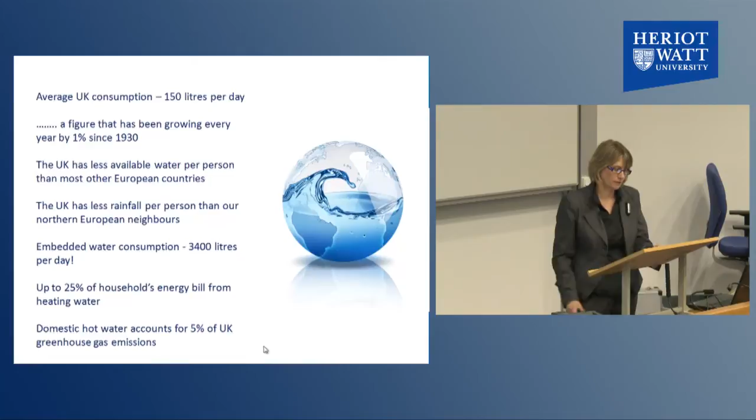The other thing we observe is that personal washing, so bath taps and showers combined, gives us 33%. Over a number of decades, you see that this percentage has gradually increased. So between these two factors, personal washing and WC flushing, we actually use quite a lot of water.

So why don't we just use less, particularly with the WC? If you think about how the WC is supplied, the water is treated to potable standard, in other words to drinking standard. It's supplied through the infrastructure, we then use it to feed the cistern, we use it to flush the appliance, the WC, so we contaminate the water, and then we feed it back into the infrastructure to treat it all over again and recycle. So hugely wasteful in terms of energy, water, and cost.

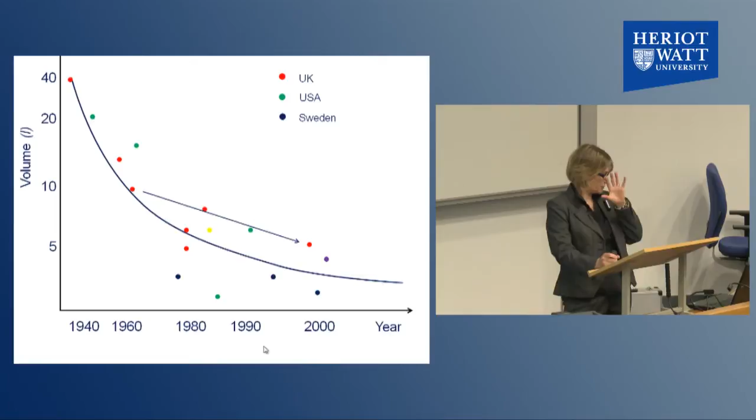And the final point, I hope they're blue on your screen, is to look at the blue dots here. They actually show the consumption values for Sweden, and if you look, they go as far back as the 1970s. These are embedded in policy and regulation in Sweden, and show that we can actually use water consumption of as little as 3 litres in a WC. That's been done quite successfully over a long number of years, and I think it really sets a good example for what we're able to do.

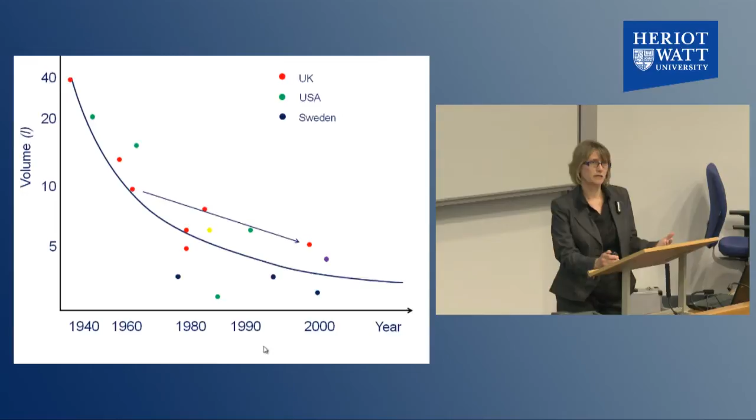So it does beg the question, are we able to still use much less water, in particular for the WC, but for other purposes as well? That brings us to the research we do at Heriot Watt. What are the main drivers behind this? Well, water conservation, we've already discussed, but we also want to save material, energy, and in some cases space in a building. The final point is we also want to make sure that we protect health and hygiene.

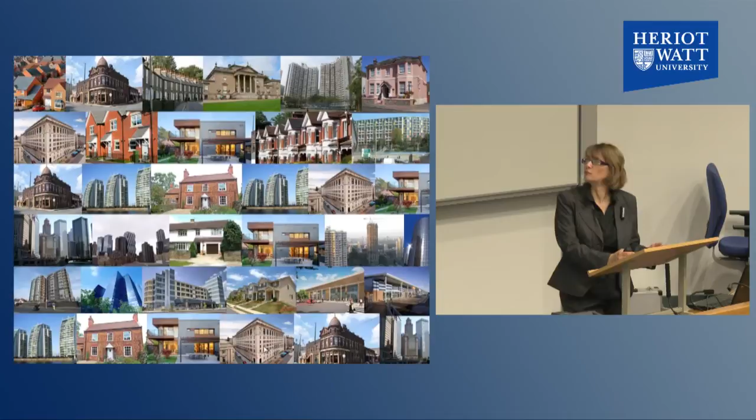To give you an idea of the scope of what's covered, we usually refer to this as being in building or at the property level. Although we talk about water conservation, and clearly that desire to bring water conservation levels down applies across all buildings, some of the research we do and the numerical modelling techniques we have more specifically apply to bigger or more complex buildings, but that conservation message applies across the board.

And finally, for rainwater, we want to make sure that we're not prone to flooding. We want to make sure there's no overtopping of gutters and no ingress of water into our buildings. So we've identified the key functions that we need these systems to provide.

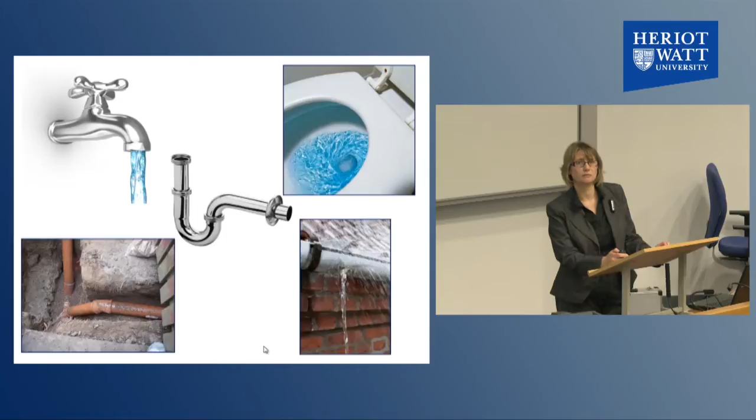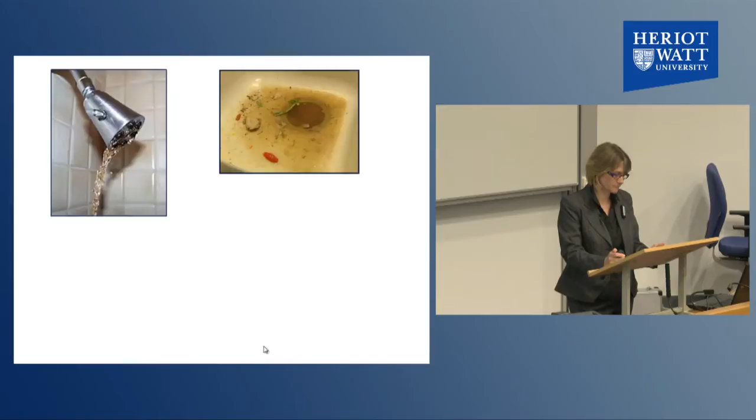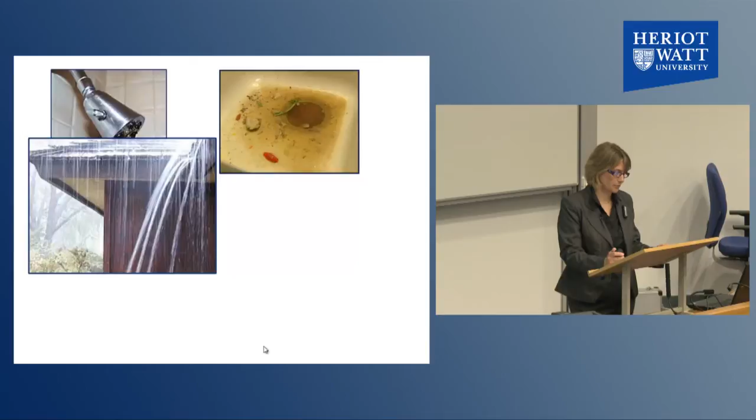You may also have had overtopping of your gutter, and this leads to a number of problems. There can be localised flooding, ingress of moisture into the building, and problems around water that gathers around the building that can then penetrate at a later date.

Where we have CSOs, combined sewer overflows, the environmental damage can be quite severe. So there's a range of cases in which the implications of failure of our systems can be really quite significant.

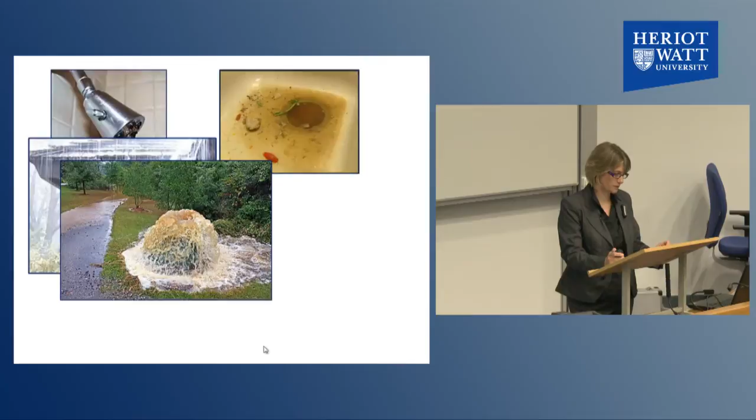You may have seen images in the news and press on what happens when we have blockage of drainage systems. These types of images are reasonably common, but still something we should be able to avoid. This type of blockage will actually cause upstream problems that can be quite severe.

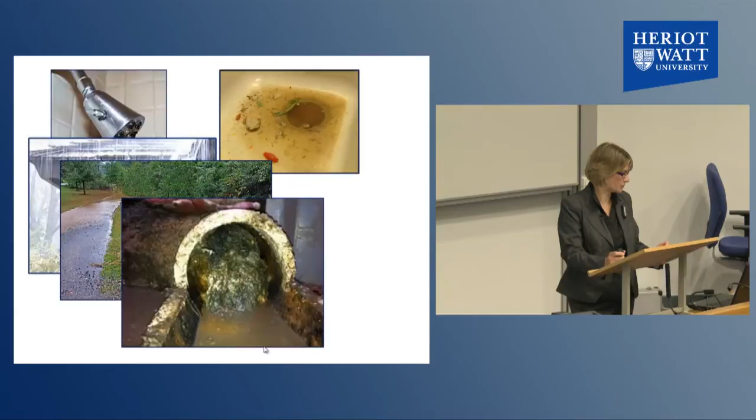Then finally, you have cases where flooding, normally combined stormwater and sewer flooding, can be particularly unpleasant, and the consequences of this can really be quite severe. Although this looks messy and it's a very unpleasant task to clean up after, there are real financial, health and social implications of this type of flooding that are particularly unpleasant.

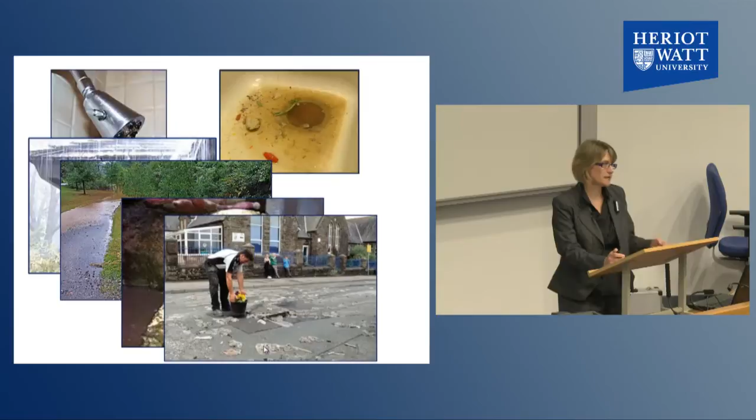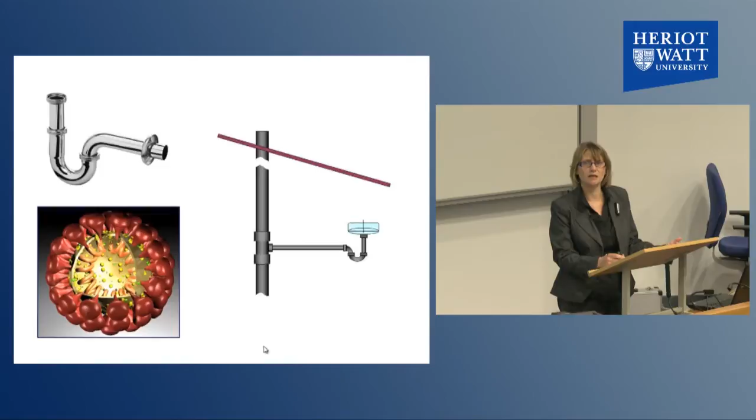And what we know is that every system is dynamic. It's dynamic because we use appliances in different ways at different times. It's dynamic because the discharge characteristics, sometimes referred to as a hydrograph, will change as the appliance is discharged into the network. And then we have attenuation - attenuation of the flow, the water or wastewater in the pipes, but also of the air and the air pressure transients as they move through the system.

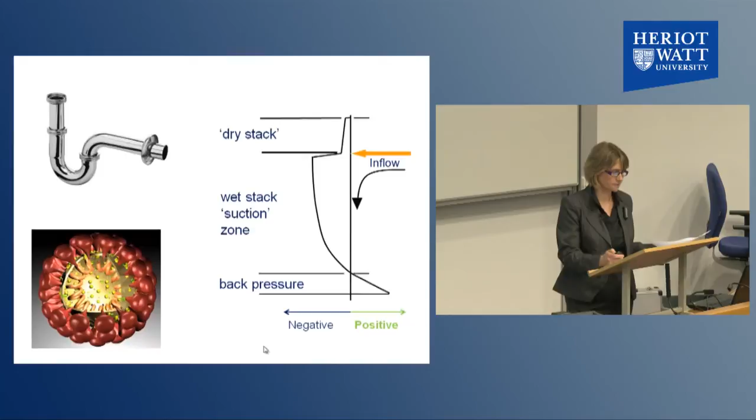What you see then is you get changes in this profile. To understand the nature of these changes, we understand the drivers, but we also develop the numerical model so that we can predict the pressure response of the system and then put control strategies in place to make sure the pressure doesn't exceed the level that would deplete the trap seal.

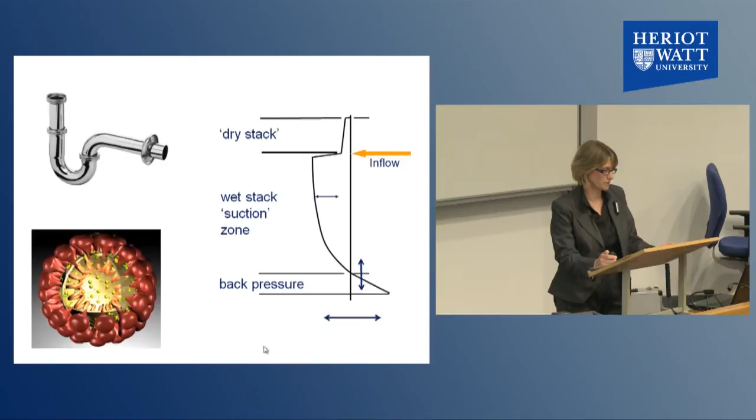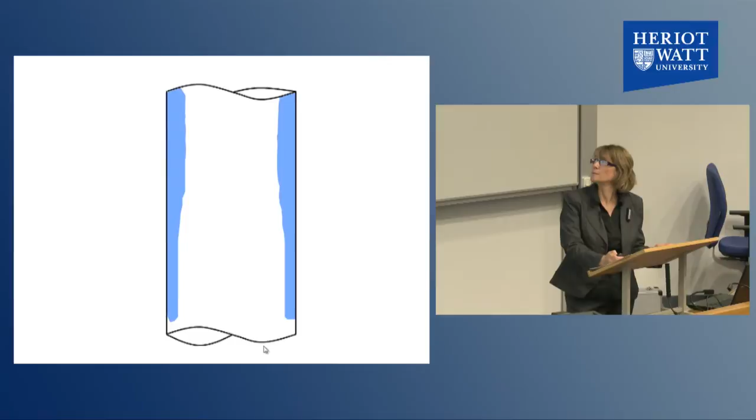So the fundamentals of the flow: we have our vertical pipe, and in that pipe we have what's called annular flow. In other words, the water doesn't fall in the middle of the pipe, it falls as an annulus around the circumference, adhering to the internal surface of the pipe. Standard theory tells us that flow accelerates as it travels down the pipe until it's balanced by the frictional force, and we reach terminal velocity and terminal thickness.

In a case like this, with a pipe approximately 100 millimetres in diameter, that terminal thickness would be of the order of 5 to 10 millimetres.

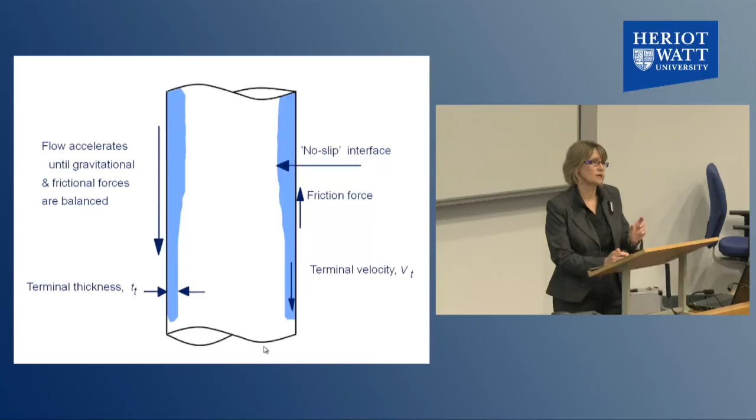The key part in all of this is this no-slip interface, the interface between that water annulus and the airflow. This is the part we're really trying to understand, because this is the driver for the whole system. It's this interface that actually draws the air through the system, generates the pressure change, and means there is a need for engineers and designers to understand performance and regulate those pressure fluctuations.

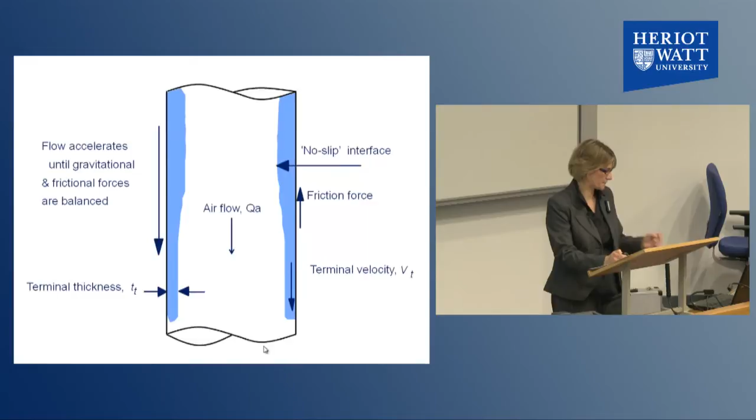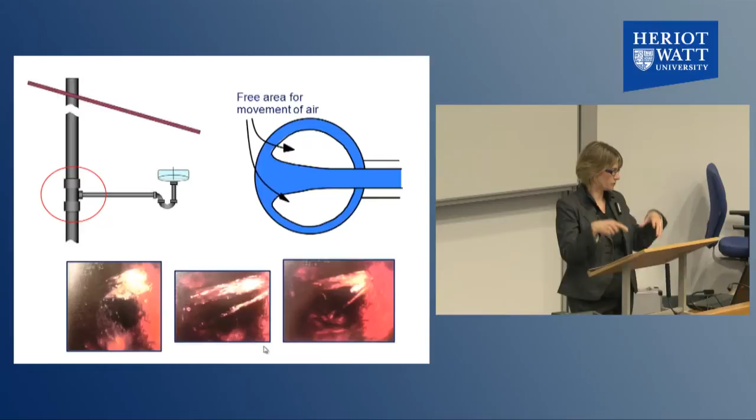Coming back to those concentrated losses, we've looked closely at the two sets of concentrated losses, one in the branch connection here. It would be nice to assume that as the flow comes in from the branch connection and reaches the main stack, it heads to the other side of the pipe, there's a swirl component, and it comes back on itself and travels downwards. This right-hand diagram is in plan view, so it would be nice to assume there's a fairly regular pathway for air to move through the system, with no real impediment other than the water curtain presented here.

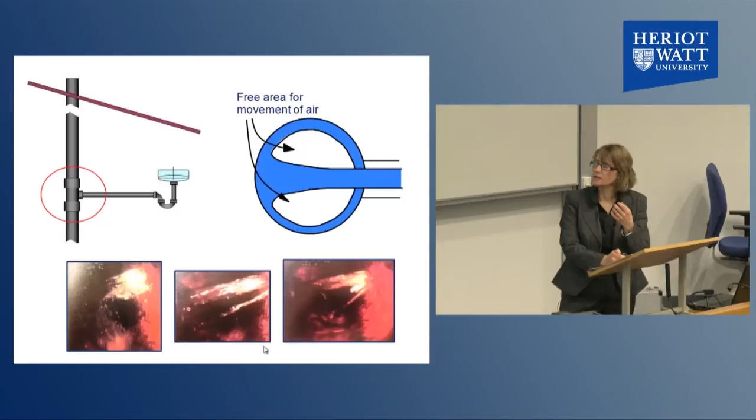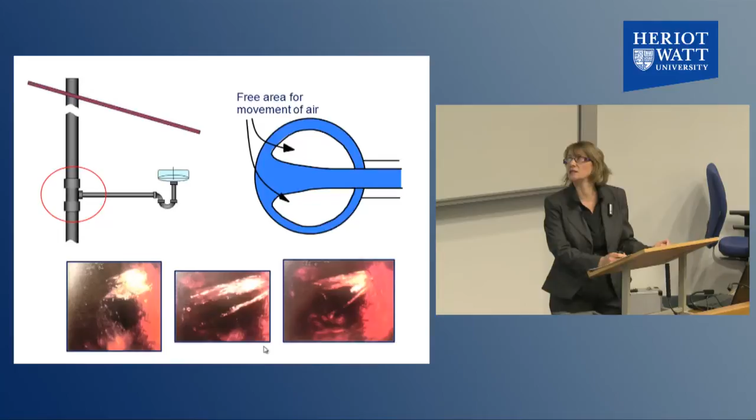But these images at the bottom, though not very clear, are actually taken from inside an active live drainage pipe. They show that the separation of the water and the air is nowhere near as clean as that. You can see we have pipe roughnesses, a slight angle on the pipe, and the water flow is not regular - it's not easy to predict the changes in that water curtain behaviour that then influence the pressure changes. At the bottom, remember, is our other concentrated loss area.

This is the other part we really need to understand. On the left-hand side, we've got the transition from vertical to horizontal. As the water comes down as an annulus and turns the corner, in this case there is no separation of the water downflow from the inner pipe radius. That means the water comes down the vertical pipe, and as it reaches the bend, it still adheres to the inside surface of the pipe, where it then falls to the bottom and is fed through the horizontal pipe. So there's no impediment, no stoppage in this particular case.

For the example on the right-hand side, though, we do have detachment - what's called a point of separation of the water. A water curtain is formed, which prevents air moving through the system and generates, in this case, a positive air pressure transient that is propagated back through the system. Now that transient has to go somewhere, so we'll come back to this later - where does the transient go, and how do we account for those changes in pressure?

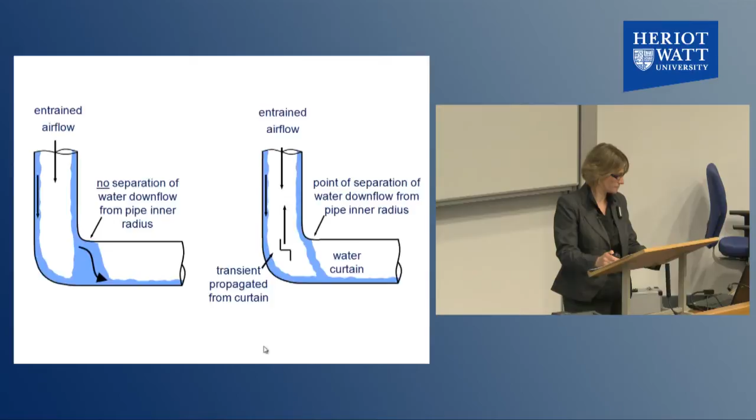1872 became a professor at the Imperial Technical School in Moscow. And he's quite an interesting character, actually. He actually established the world's first aerodynamic institute, and he mathematically defined the origin of aerodynamic lift and the optimum shape for the aerodynamic shape that we see on aircraft wings.

Within the context of water and what we're looking at here, though, he actually also established the water hammer equations. And it's those equations that we use to drive the model and to understand the changes. One of the key things to remember from this work is that the rate of change of flow condition is the determinant of the potency of the transient.

What we also know from this work is that if you actually multiply together some of the factors that indicate how high the pressure change might be, we would multiply fluid density, wave propagation speed, so this is how quickly the change is communicated through the system, by the change in velocity.

And if you take something like a WC, which perhaps at its peak has a discharge flow rate of around 2 litres per second, what that translates to is a vertical flow velocity of around 1 metre per second. So you can do this sum in your head.

You've got velocity of 1 metre per second that's then stopped by the curtain at the base. So 1 metre per second is stopped. We have a wave propagation speed of the speed of sound, so roughly 340 metres per second, and the density of air is around about 1.2. So you multiply those three things together, you get something of the order of 400 pascals, or roughly 40 millimetres of water gauge. So that gives us then an indication of the level of pressure.

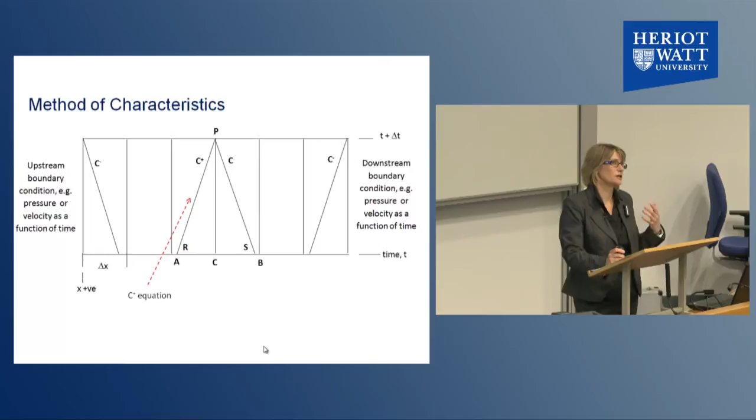The first is that if we look at these characteristic equations, these are the equations that communicate the change through the system and allow us to predict the pressure and the airflow and velocity through the network. So defining the characteristic equations is quite important.

Embedded in there, we'll come back to this, is the friction factor that is the driver between the water and air interface. So we need to understand that condition.

We also need to understand what we refer to as boundary conditions in any model. Identifying those boundary conditions in the case of a drainage network, they would be pipe elbows, traps, and pipe terminations. Those types of boundary conditions have to be defined and then fed into the model. But once that model's built, we can look at the way the system responds in terms of pressure and airflow, and we can begin to control the pressures through the whole network.

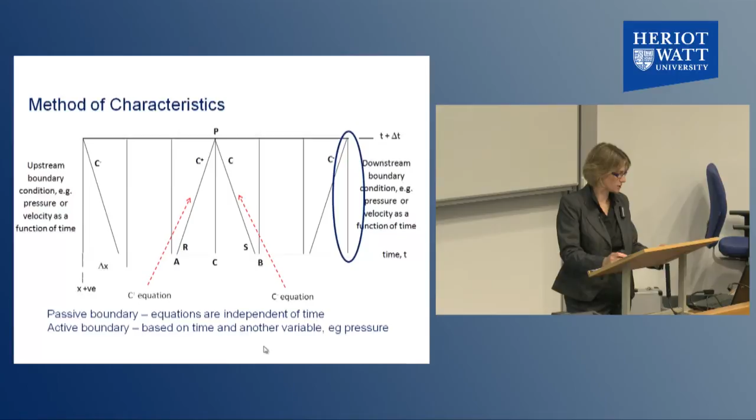We have two different types of boundary. One is passive, in other words the equations are completely independent of time. The other is active, meaning there's a time variance to the definition of that boundary condition. To give you an example of the types of active boundary that we might have...

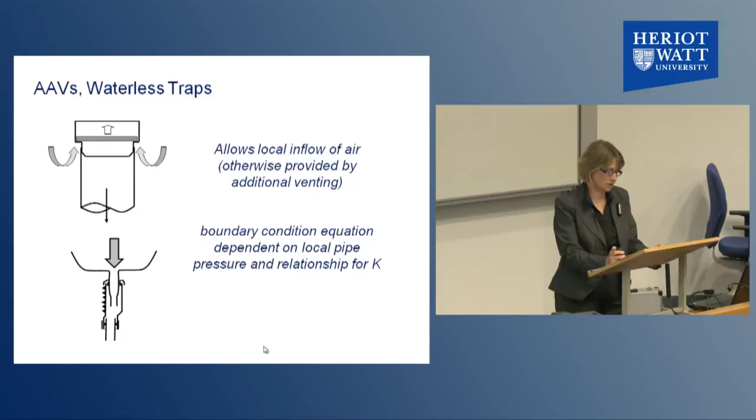What that's done is use of the model has allowed us to develop a product called the PAPA. We've dealt so far in the lecture only with negative pressures, but recognizing that we have positive pressures generated at the stack base, the PAPA was developed at Heriot Watt based on the application of the simulation model, and deals with the positive pressures in the system.

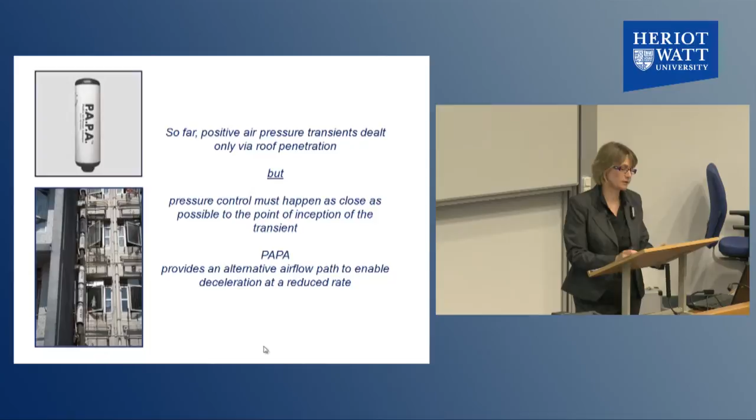The PAPA has inside an expandable bag that changes the way the wave is transmitted inside the network, decelerating the flow so that we come back to this rate of change issue. The PAPA provides an alternative airflow path to enable deceleration at a reduced rate, and that's the key point of the PAPA. You can see here in the lower diagram a case in Hong Kong where some of the PAPA devices are fitted in series to a building that had particular problems with positive pressure generation.

You might recall the diagram where we had the interface between the water and the air, which was assumed to be very clean. You've probably surmised that interface is not quite as clean as indicated by those diagrams. So what we have is a friction factor that operates at that interface where it's not clean at all, and we have some mixing of water and air. It's almost a two-phase flow in the central component of the stack. Trying to understand the surface and the driving factors, the no-slip interface is really what drives the numerical model.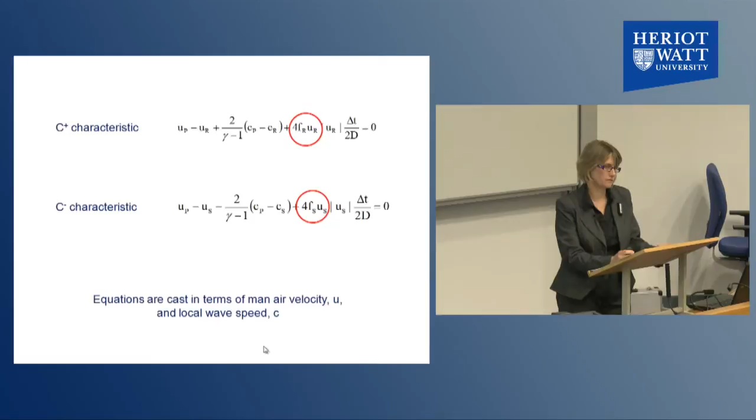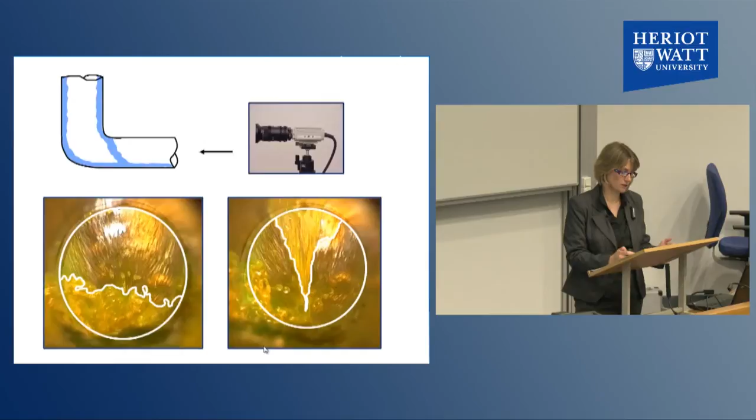This one doesn't have a particularly large surface area, but if that surface area was to increase, you could potentially have a blockage or impediment complete across the cross-sectional area of that pipe. In similar images, you can see where the water curtain coverage is much more significant. On the left, a much higher percentage of coverage, and on the right, an image where the coverage is complete.

It looks a bit similar to the first one, but there's a layer of water in the upper section of this image and turbulent flow in the lower section. So what we're trying to understand is how that water curtain formation is generated, what the drivers behind it are, and how it influences the generation of positive pressure transients in the drainage ventilation system.

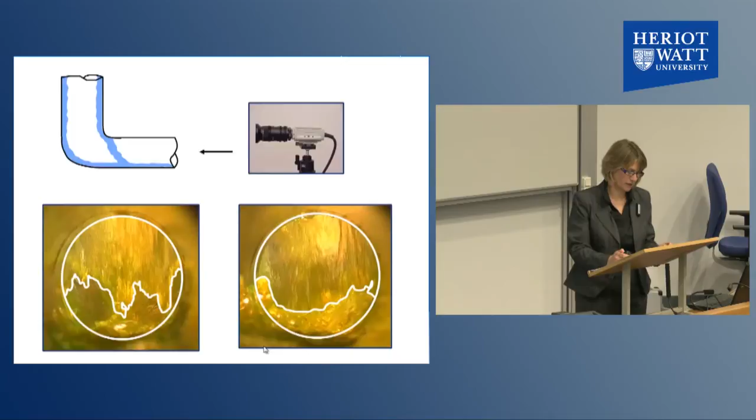We did think initially that this was completely flow dependent and flow dependent only - when you have a lower flow rate, you don't have detachment, and when you have a higher flow rate, you do have detachment. Some of the early results might have indicated that was the case. But once you analyse the data more fully, you see that's not the only driver - there's something else that up to this point we hadn't quite understood in full.

That's because once we looked at what happened inside the vertical stack, we could see this phenomenon reasonably clearly as we progress towards the bottom of the stack - these chevrons of water, or waves of water, as they travel towards the bend at the stack base. The key thing we found is that this phenomenon is well recognised, certainly in civil engineering terms, as roll waves.

That happens in this vertical stack as well. So even although you have a very steady inflow through a branch connection, a very steady downflow inside the vertical pipe, these roll waves still form. What we've been able to show is that there's a connection between the formation of these chevrons as they move towards the bottom - a connection between these roll waves and the formation of the curtain.

So the finding tells us that the link between water flow rate and the formation of the curtain does not act in isolation - there's an additional component that comes from the roll wave generation in this vertical stack.

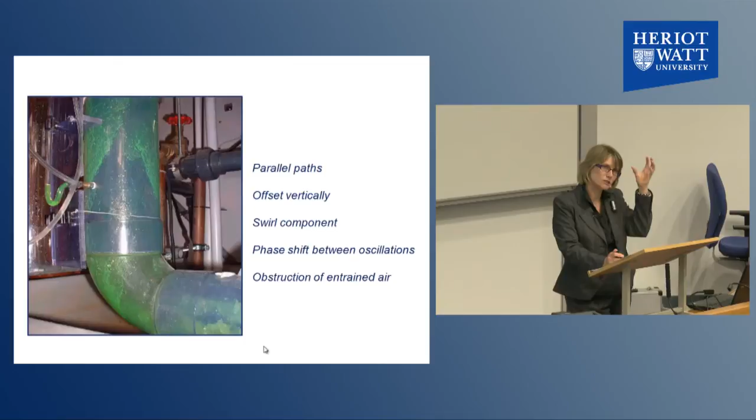Once you look at those roll waves in more detail, you see that they have parallel paths, but they also have an offset that works vertically and a swirl component, so they actually move around the stack, and there's a phase shift between the oscillations. Once you analyse the data, you can see a phase shift that suggests we have quite defined roll waves with a common frequency of around 4 Hz.

We can see a connection between that frequency in the stack and the frequency of generation of the water curtain, which then gives us pressure transients that we would have to be able to control.

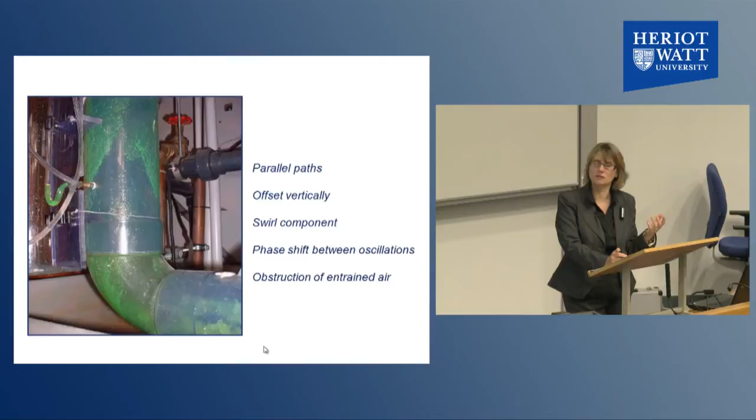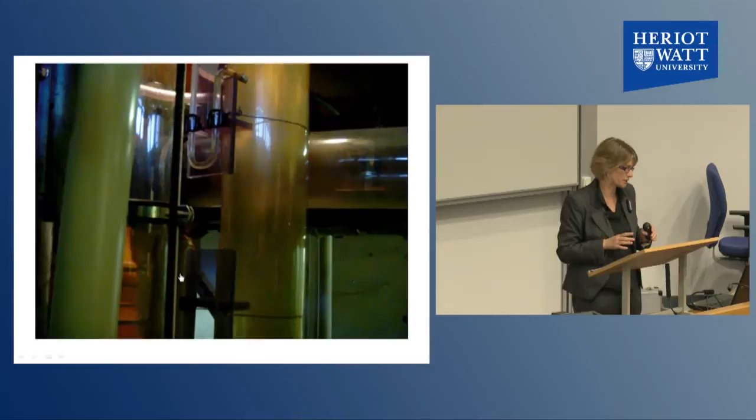So I have a video here. I'm hoping it works - this one is not a great view, but hopefully you can see from this video, you can almost see the 4 Hz frequency in the stack here. Please remember, this is a very steady inflow to the pipe. We've eliminated all the factors that might give us some kind of fluctuation, but you can actually see that's not a clear and steady discharge down that vertical pipe and into the bend at the base.

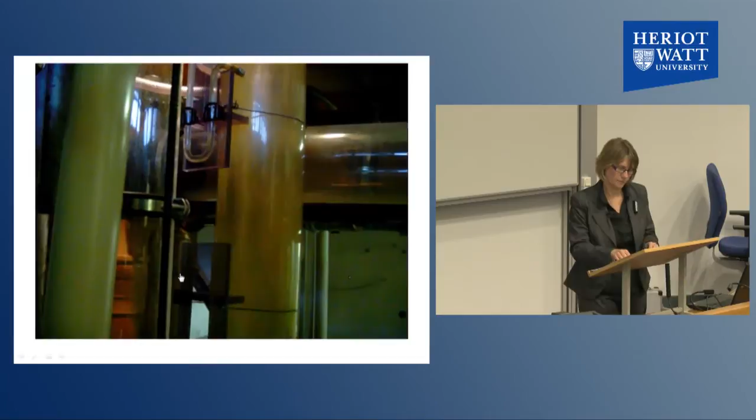It's quite difficult to see the 4 Hz, but if you look closely enough, you can actually see the variation here.

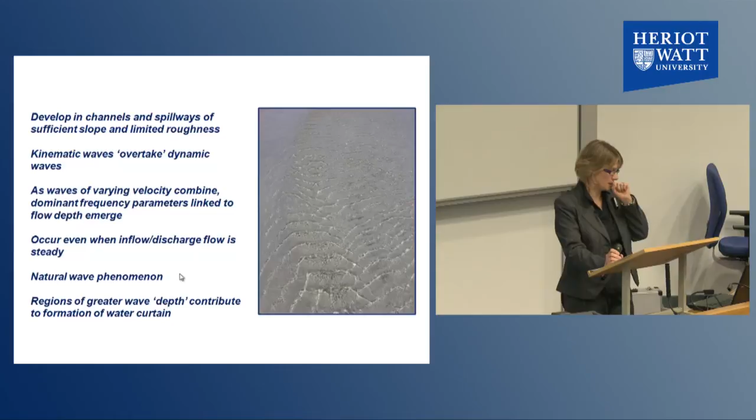So what do we understand about that phenomenon in the stack? We recognise it as being roll waves, which are well recognised, especially in civil engineering terms. Roll waves develop traditionally in channels and spillways, where there is sufficient slope and limited roughness. Fundamentally, the kinematic waves overtake the dynamic waves, and you have a building of wave parameters that means you have dominant flow depths that emerge in the roll waves, and that's why we think we see them in the vertical stack.

But it is very much a natural phenomenon, something that once we'd eliminated all of the other factors, we could still identify. What we're trying to do now is make quite clear the connection between the roll wave formation and the generation of the positive transient.

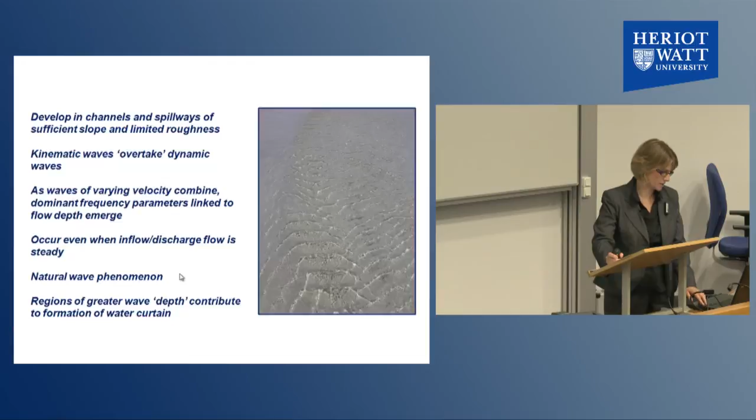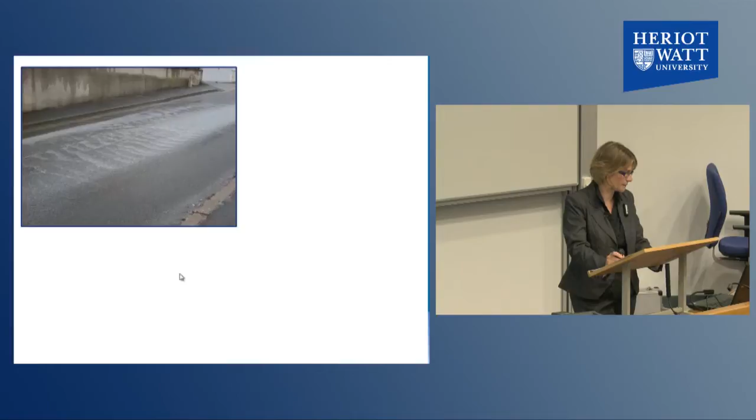So some other examples of where you might observe roll waves. Once you know they exist and start to look for them, they are actually quite common. This is just an inclined roadway, and you can see the formation of roll waves here reasonably clearly. You can also see them in the spillway, quite dramatic actually, where we would probably recognise them most.

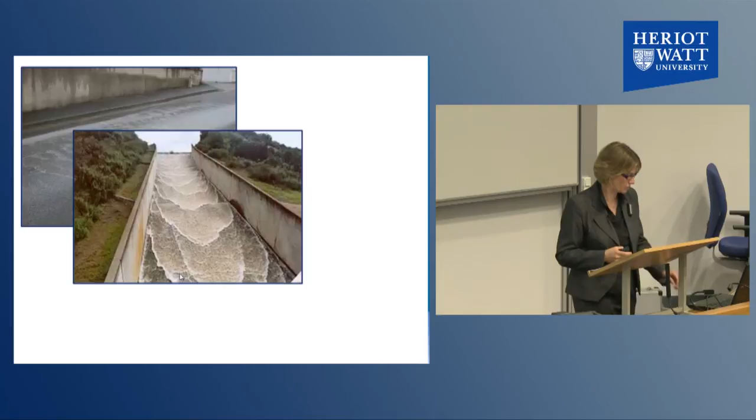In this case here, which is slightly different, I'm just going to pause for a second and throw the question to the audience and ask if you recognise these roll waves.

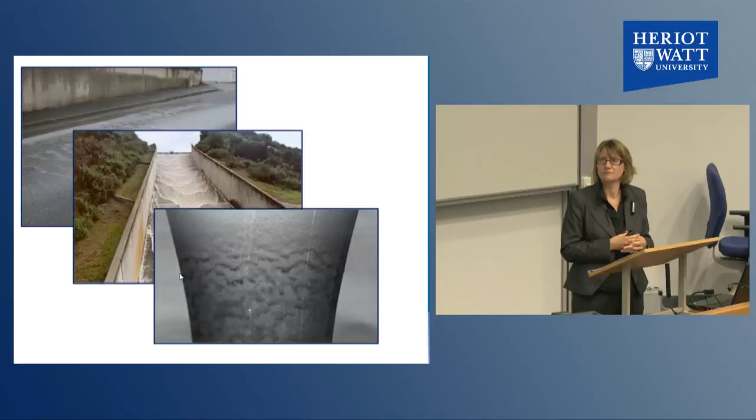Well done, I think the principal was the first one to answer there. I'm not sure what that says. Yes, indeed, there will be a pint waiting for you outside, principal, because of that answer.

So I guess if you take one thing away from the lecture, recognise the existence of roll waves, whether it's linked to Guinness or not, I'm not quite sure. The mathematical definition of these roll waves is not identical, so what happens in this particular phenomenon is not identical, but there are similar mathematical characteristics that we can relate to what happens in the vertical stack.

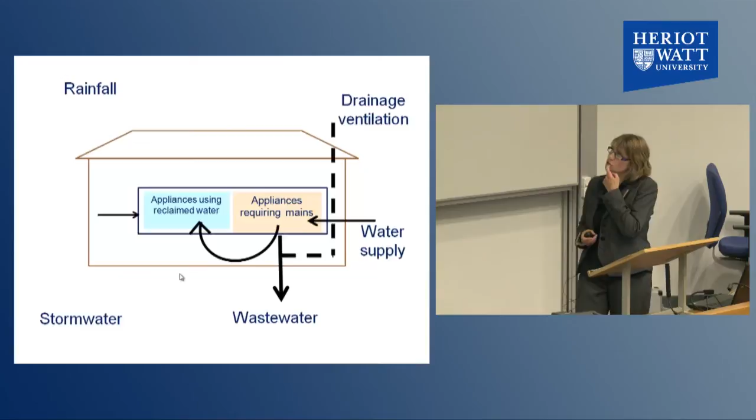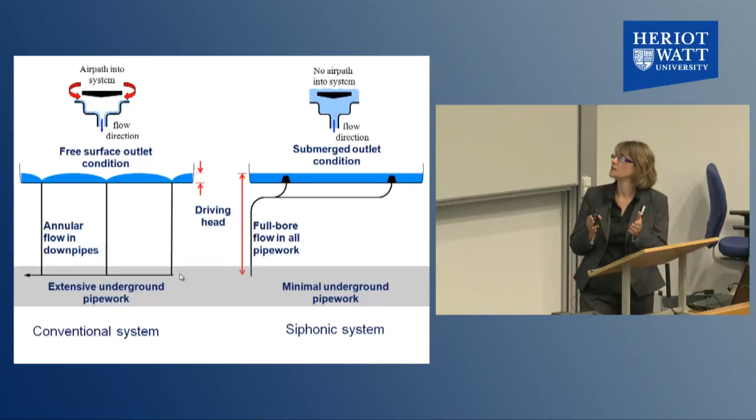You also have noise and vibration, so when these systems prime, you can actually almost hear them. Although in many cases they don't prime, so the design point can often be removed from the point at which you'd want it to be fully primed.

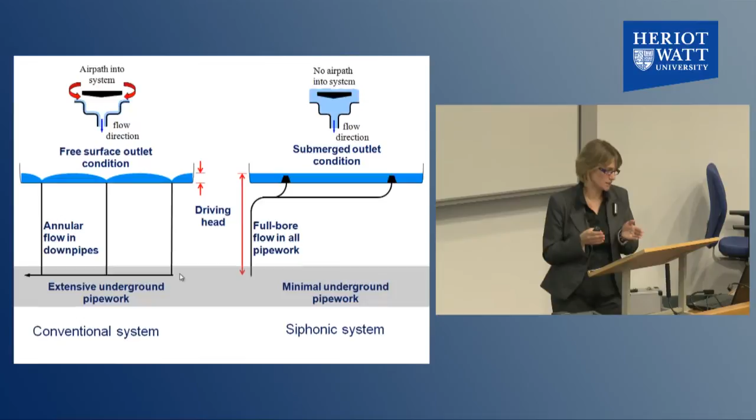So if you ask somebody responsible for a siphonic system in a building whether the system primes, they'll often say, I don't think so. But you do need it to prime when you reach that specific design intensity, so you need to understand how that system works.

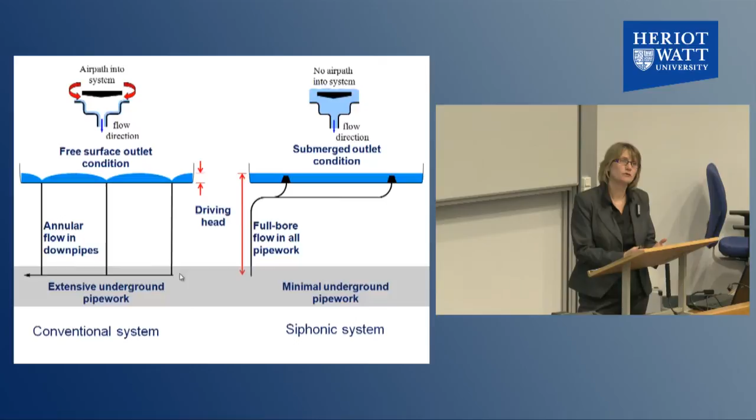We also have an ideal case where we can predict the performance of the siphonic system, but what we have in practice is quite different. Partly this is because we get an accumulation of detritus in the gutter, building up around the outlet. So you move the operating point and actually move the loss coefficient of that outlet.

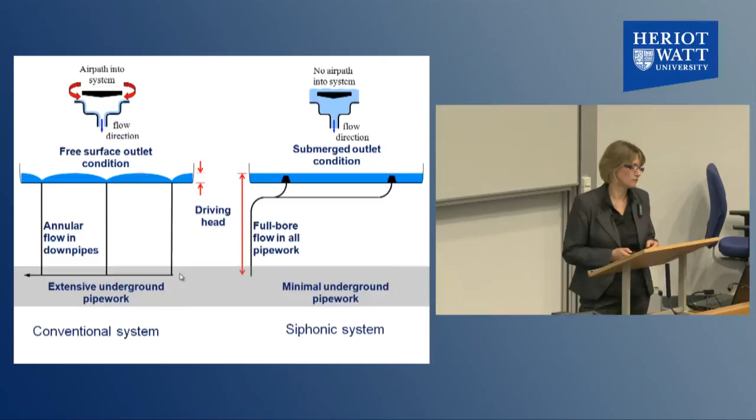We also need to understand how the performance of systems changes with time as we see changes in rainfall conditions with climate change. The codes tell us how to design siphonic systems, but like in the previous example, they specify steady state conditions.

Once the system is operating, we can see how the calculations are done, and they're very straightforward, but they don't predict any of that dynamic behaviour. So we use the model to try and understand the response of the system as it moves along the hydrograph curve towards the peak of flow intensity.

The things you're trying to avoid are gutter overtopping. You want to make sure the outlet is kept clear of blockage so it doesn't affect the performance, leading to flooding issues. So I have a video here, it's quite difficult to describe.

So I have a video here that shows the installation in the lab. This is a roof panel with a gutter with a siphonic outlet installed.

It's quite a high flow rate, and you can see that the outlet becomes submerged quite quickly, but really the key point happens underneath with this priming.

Now if you watch the priming of the pipe here, you'll see that about 15 seconds into this video you begin to see the pulse flow, and then it eventually moves to full bore flow. Modelling this component through to the full bore phase is the part that we try to understand.

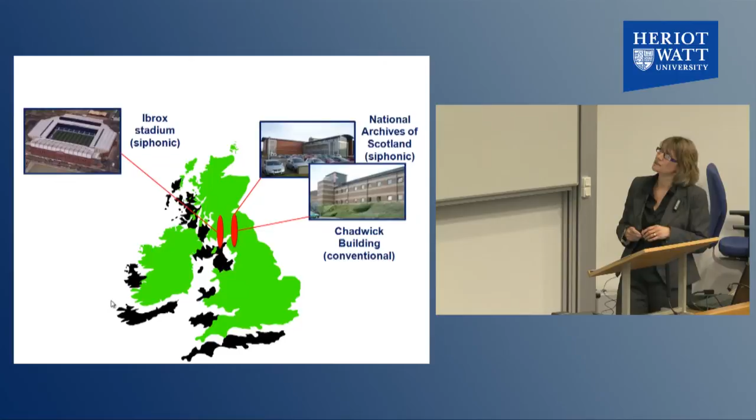The example on the right, other than the Chadwick Building, is the National Archives of Scotland building, which did have - it's a long story, but they've now moved to conventional - a siphonic system that we monitored for a long period of time to try and understand the changes in the gutter.

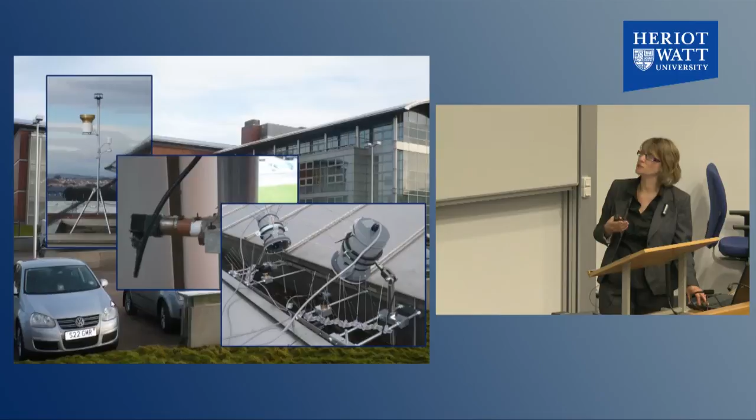So what you have here is a shift in the design point. It affects the capacity of the system, and we're able to model that by looking at the change in blockage and change in characteristic of the loss coefficient.

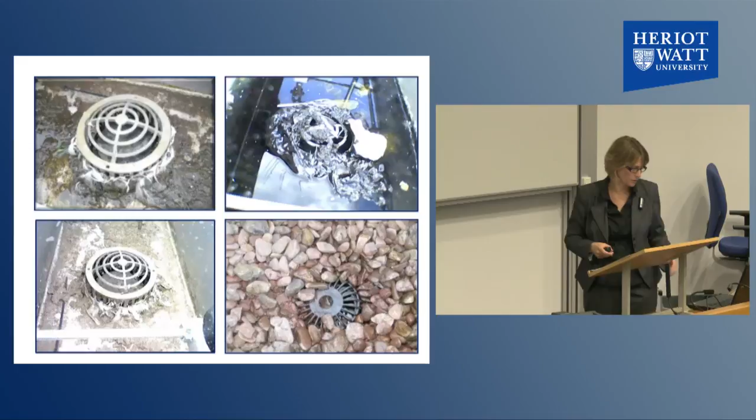So the key message is the in situ performance can actually be quite different to the design condition.

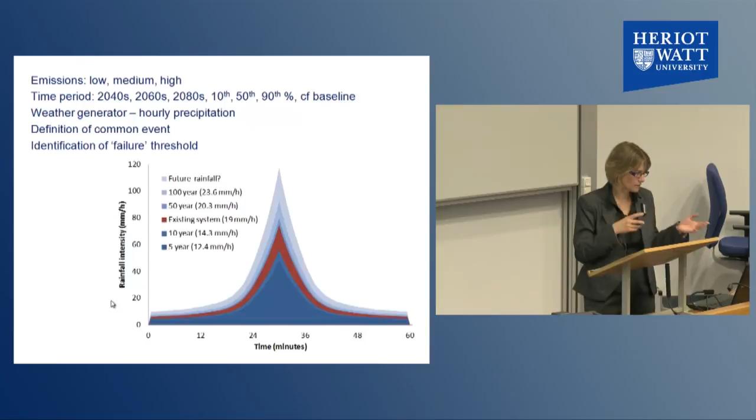In terms of climate change, we mentioned this briefly. If you've ever looked at the UKCIP site, the climate change site, you can see that from the funding DEFRA provided, DEFRA was able, through UKCIP, to generate what's called the UKCP09 data, climate change data. It's accessible to everybody and well used in the academic sector as well. What you'll recognise is that it's cast across three emissions scenarios - low, medium and high - and a number of time periods, with probability percentiles against a well recognised baseline of 1961 to 1990.

From that particular website, you can download a weather generator that will give you a synthetic rainfall event that allows us to drive the model.

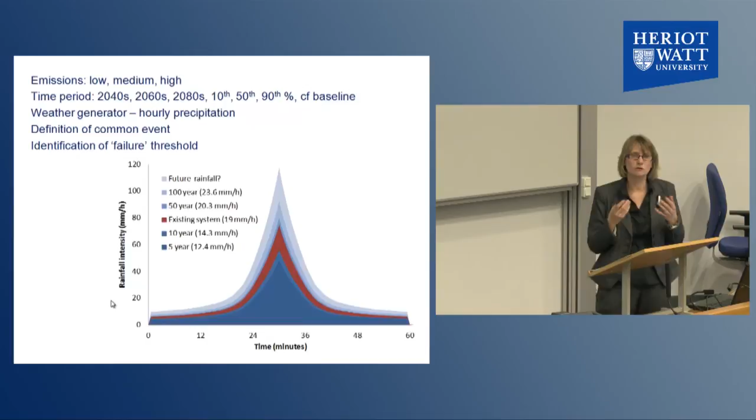What we did was this: we defined a common event applicable both to the building system and to the curtilage system, and then identified a failure threshold where you can identify the point at which you would not wish to exceed the rainfall intensity. In most cases, the failure threshold is when the gutter begins to overtop. So we were able to identify cases where you would have exceedance of the system.

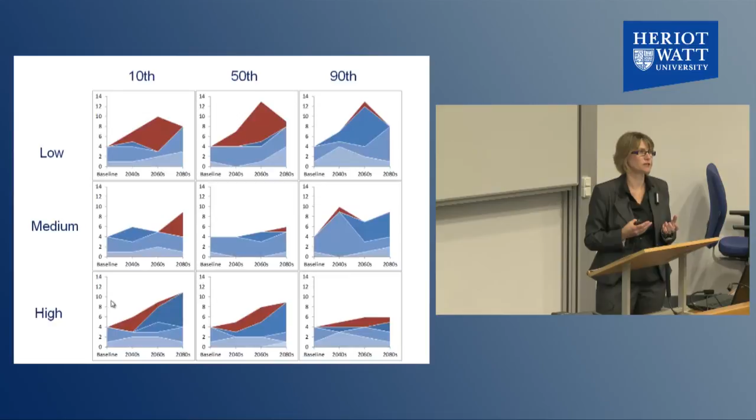A system has undercapacity under these different emissions scenarios, and this is information that you would share with the building manager so that he or she would then know when to go and take some remedial action.

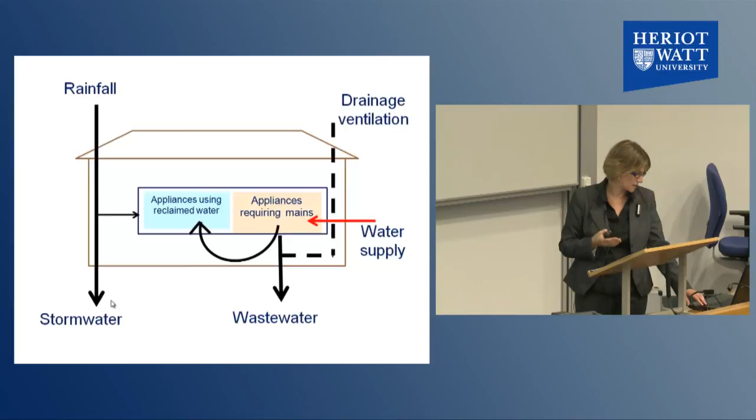There's a cumulative effect, so it's not just one appliance with a reduced volume of water. You bring these all together, and across the piece, within a whole building, and in some cases a very large building, the overall consumption of water can be quite significantly reduced. So what does that do for the performance of systems? Do we still have the same drain line capacity for our horizontal drainage? If you reduce the water use, you reduce the depth.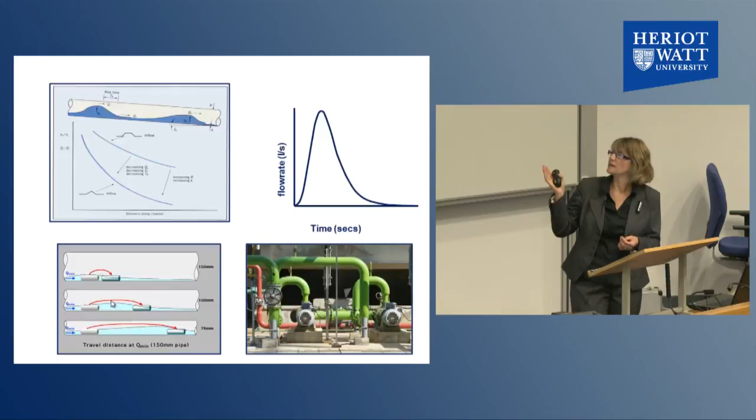Potentially, unless you design correctly, you can reduce the drain line carry. Pumps and pipes, are they still sized properly? We think not. We're just about to embark on a piece of work that looks into how we should be designing pumps and pipes for this new cumulative effect of water conservation in our buildings.

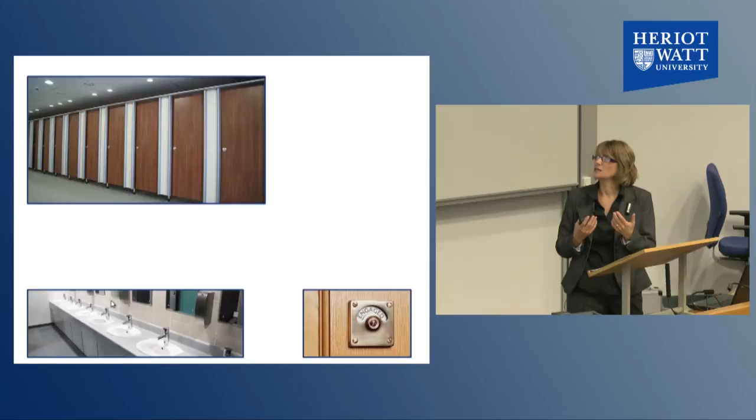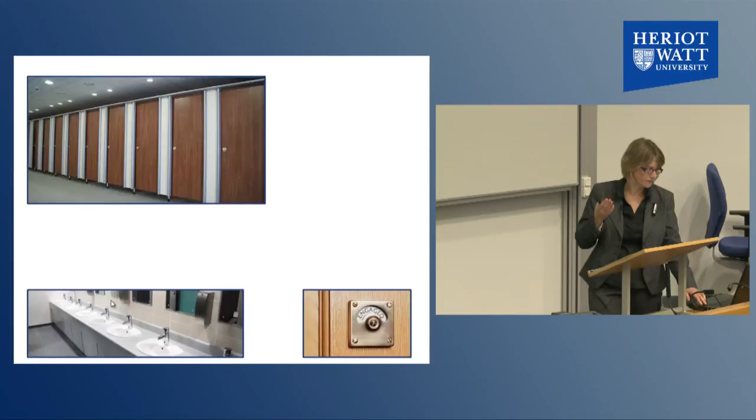One aspect we're just about to move into is environmental psychology, looking at water use from the perspective of the user. So as you go into a toilet block with a number of cubicles, which door do you go to? Is there some environmental behaviour reasoning to this? It's difficult to discuss without having a train-spotting moment.

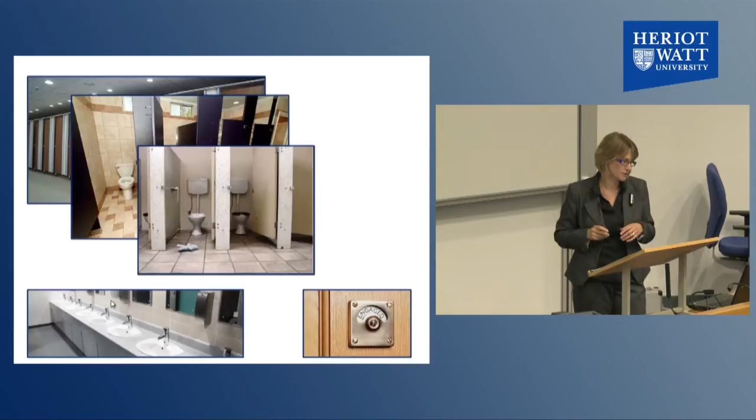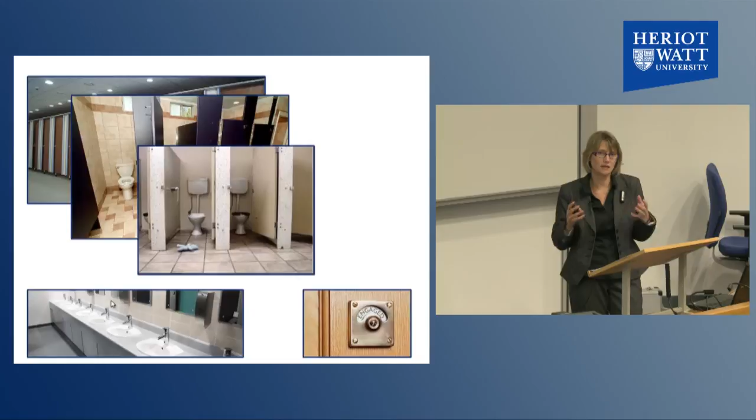There are clearly a number of influencing factors, but it's believed there is a driving force that means you will use the same area of cubicles consistently, as long as conditions are the same. Where cubicles are particularly dirty, people avoid them. This calls into question whether our design schemes for these bigger systems are right. Are there particular appliances that are never used because of conditions that mean people don't want to use them?

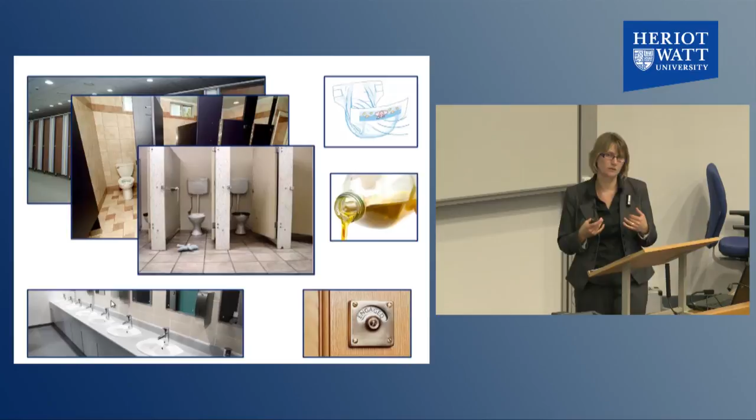Then there's the behavioural aspect. It's an ongoing problem where people throw things into the drains that they're not supposed to, and we're interested in the behavioural side of this and what it does to system performance.

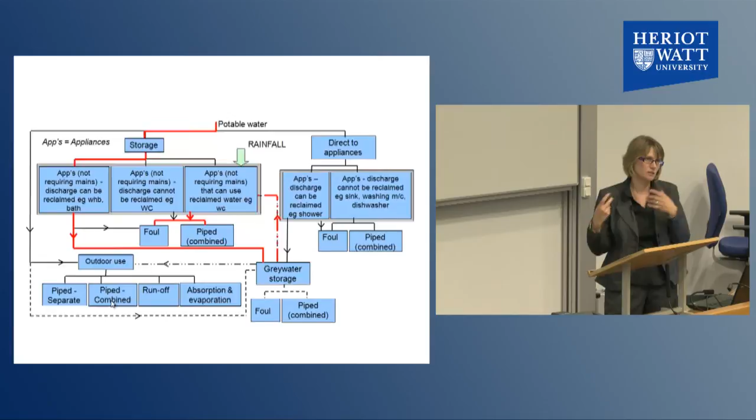Looking at this holistically, what we're trying to understand collectively is the water flow through a building. What you're seeing here is one chosen route for water. Once you identify all these connections together, water reclamation being a key part, you could easily use water discharged to the drain and never use any of it again, but where you have water reclamation or recycling, you actually have quite a convoluted flow path.

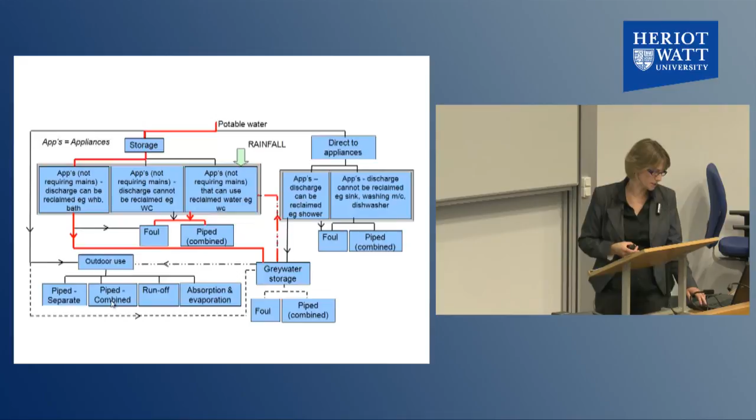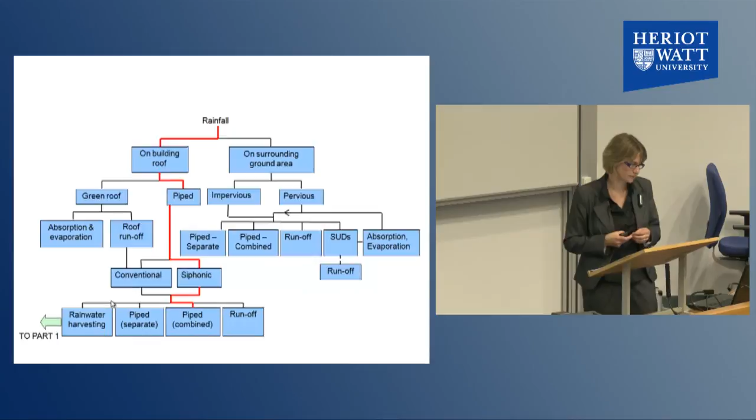We're trying to understand some of these flow paths and allocate transfer characteristics to them so we can identify the residence time, which is a key identifier and leads also to social acceptability in some of these systems. One of the things we're currently trying to do with some PhD students is to understand how these flows work.

To sum up, the things we cover collectively as a group, not just myself individually: internal building drainage systems, sanitary appliances and how we use them, small-scale local drainage and runoff of the curtilage - including rainfall and all the water used within that boundary - and roof drainage, conventional and also siphonic.

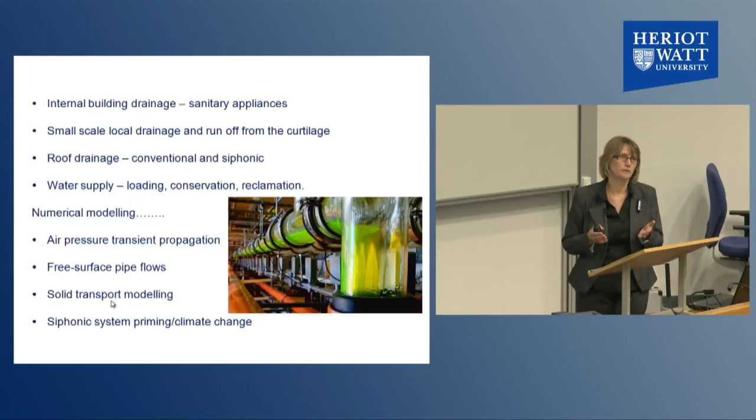And water supply - we've talked about water conservation, but there's a loading issue relating to pumps, and reclamation of water as well. All of this is underpinned by numerical modelling, which we use to identify air pressure transient propagation, free surface pipe flows, solid transport modelling, and the priming of siphonic systems.

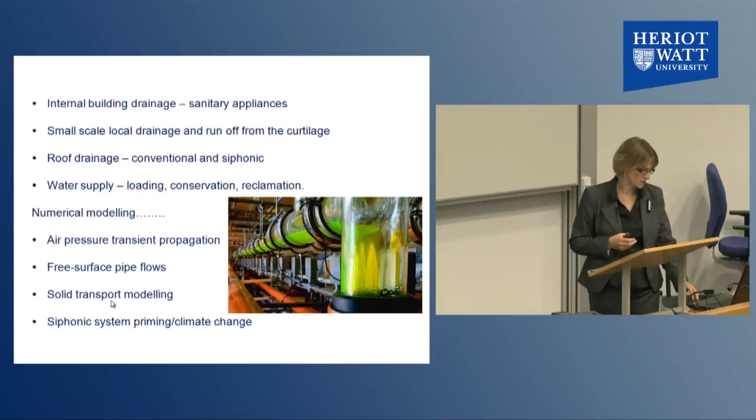Finally, I'd like to acknowledge the input from the wider team. This is not something I do alone - there's a team of people who've been around for quite a long time and done a lot of work in this. It's a research group founded by John Swaffield when he came here in 1985. Only this afternoon we had the inauguration of the John Swaffield Building Services Engineering Laboratory.

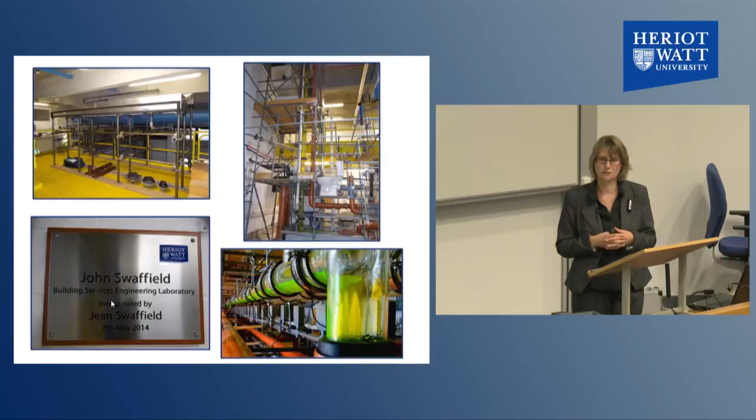I'm pleased that Jean joined us for that event and joins us here this evening, so thank you, Jean. All of this work is not mine alone - it's part of a group, part of a wider spectrum of activities we undertake in water supply and drainage, and I'm grateful to my colleagues for their input to this presentation. Thank you.